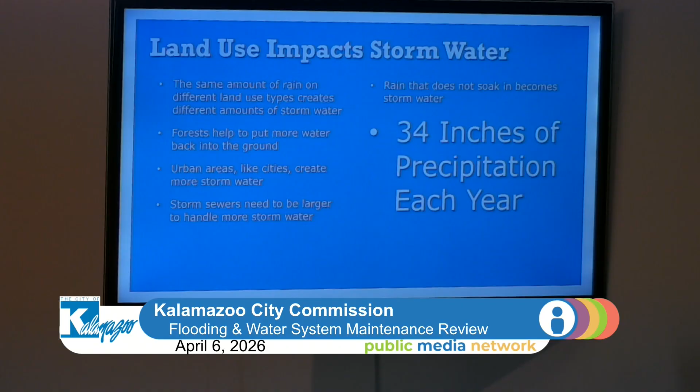Rainfall events themselves are very important to runoff. We could have a storm that comes through and drops a whole lot of rain in a short amount of time, like a thunderstorm dropping a lot of rain in 15 minutes. That's going to produce a different amount of runoff than a storm that occurs over a whole day. Our stormwater systems are conveyance systems - that means they take rain over a volume of time, so they take volume per unit time to convey it. You get a very different result when you have, say, 2 inches of rain over a whole day versus 2 inches of rain in an hour.

Our stormwater system was designed several years ago. There is certainly maintenance needs that we've got to look at. There's also infrastructure needs that we've got to look at for that overall stormwater system.

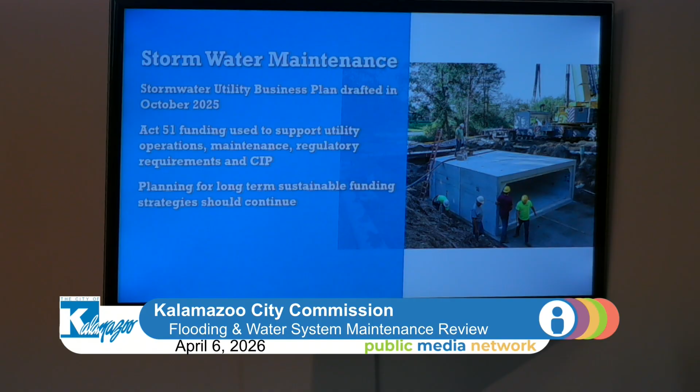We worked on a draft business plan that we put together last fall that identified maintenance strategies and capital improvement strategies specific to our stormwater system. That also developed a revenue requirement that we could then build into our budgets to create a funding model for that stormwater maintenance. We then used the budget process this year to put those costs beginning in 2026 into a long-term budget using right now Act 51. There's still a need for a long-term funding strategy for stormwater, and that's something we're going to continue to work on in the years to come.

Some of the things that we are working on are annual river cleanup events. That's Kalamazoo River, Portage Creek, Axtell Creek, Arcadia Creek, and Davis Creek, where we come out usually in the spring and do cleanup events of the channels, trash, tires, that sort of thing.

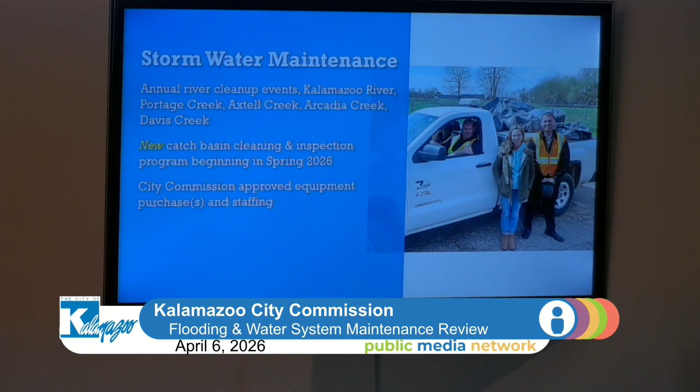We've got a new program, Catch Basin Cleaning and Inspection Program, that's going to launch this year. That's something where City Commission approved some equipment purchases, also approved staffing, and that's going to roll into a program that's going to carry us out for the next 3 years.

The stormwater maintenance strategy is going to focus on those catch basins that we talked about, those inlets, actually pulling the covers off, and then going into the chamber itself and cleaning that out. Inspecting that chamber as well with a work order system, and then reporting back defects so that we can continue to build our capital program.

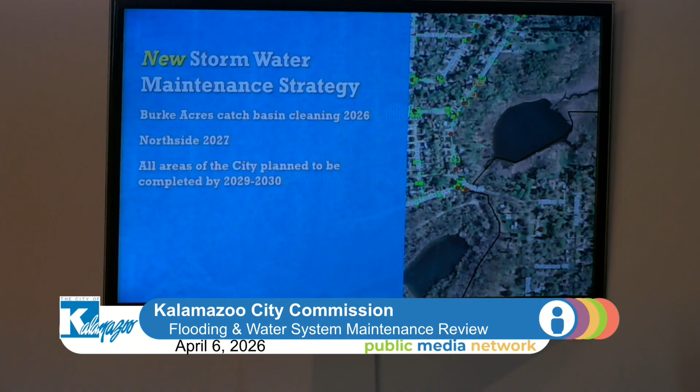This work is going to happen from now through 2029 into 2030. We're going to start in the Burke Acres neighborhood, and we're going to kind of move across the city to the west and then south. So we're starting this program where we started our lead program. That way we're already out ahead of ourselves in terms of a lot of the work that's happening at neighborhood levels. So we didn't want to be in the same neighborhoods doing all this work where we're also doing that lead work and we're also doing that gas main work. So this is happening in areas that have already seen that lead work happen.

We're also going to be sampling 66 outfalls in specific creeks, Axtell Creek, Arcadia Creek, and Davis Creek.

We want to talk through some of the solutions that we have in this urban non-riverine flooding scenario. So we've got a lot of rain. The rain comes down faster than what can go into the storm sewer system, and that can be for a number of reasons. It could be there's defects with the storm sewer system itself. Those could be operational or structural defects. It could be things like leaves or dirt over the drains. It could be broken pipes, that sort of thing.

We also have programs where you're going to start seeing programs in 2027 where we're going to be doing green infrastructure improvements. So these are some new strategies that we've got, just a few in place already. We have one on Water Street right by Anna Whitten Hall where we've got some stormwater offlining. We're going to see more of these projects coming into our portfolio of work. We're going to do some on Burdick Street. Those are programmed for 2027. These are areas where we'll take flow that was going in the stormwater system and we're going to infiltrate that in areas where we can handle that capacity.

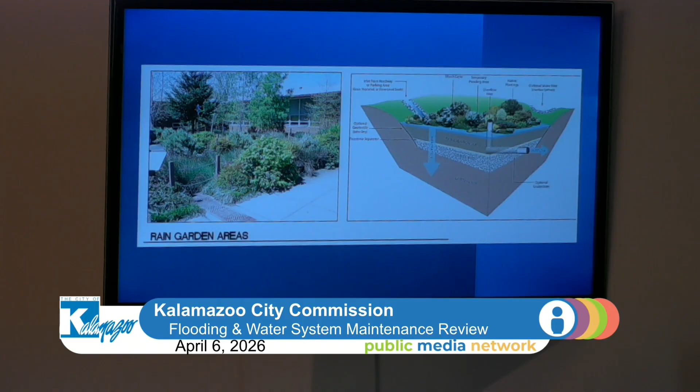We did this type of project a few years ago at the intersection of Church and Hopkins. There was a lot of localized flooding occurring there. It would rain so hard that the water couldn't get into the storm sewers, and the adjacent homes were experiencing basement flooding during storm events. This work was done by city crews over the summer of 2022, and it was very successful in resolving those types of flooding issues.

So a lot of work in the pipeline, so to speak, for the storm sewer system. We're going to get out and clean every structure, over 11,000 structures, in the next 3 years. That's going to open the door for more work as we find out what the defects are with those structures - are there broken pipes? Do they need to be rebuilt? We do have the ability to go in and put in those Kalamazoo double inlet structures to resolve some flooding hotspot issues where we have them. We also have plans to start incorporating green infrastructure with some of our projects coming forward where we have the ability to infiltrate.

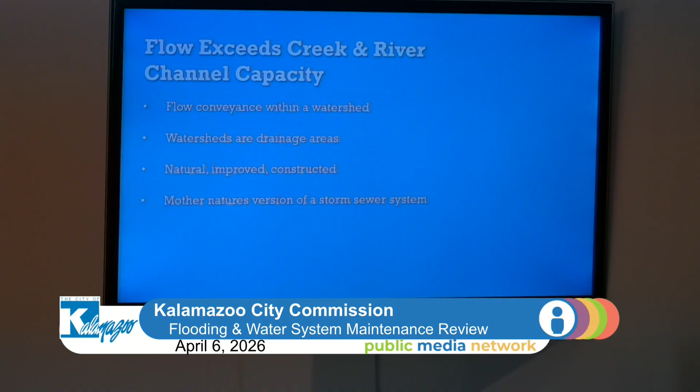So if you think of creeks and rivers like nature's storm sewer system, we're looking at capacity deficiencies there as well. We can see this with Mother Nature, where there's more flow than what a channel can handle. How much flow can a channel handle? That's dictated by the shape of the channel, the slope of that channel, and whether there are obstructions, bends, or bridges in that channel.

So we talked about a lot of solutions for the storm sewer system. When we talk about the Kalamazoo River, it's a little bit beyond us. There's flow coming to us that propagates to the west - once it's coming out of Battle Creek, it's coming our way.

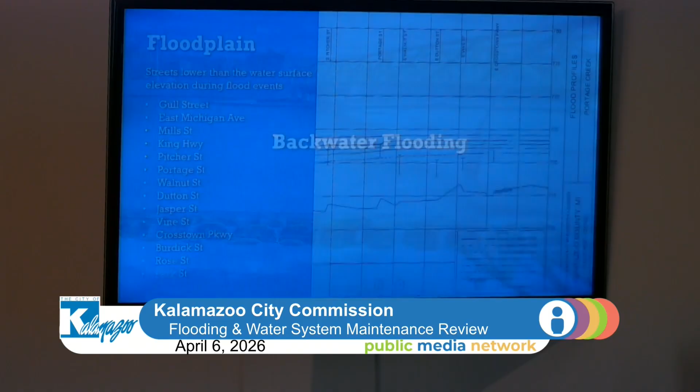Which introduces us to backwater flooding. Backwater flooding is just the terminology for water that is coming back into the system. Water can come back into the system on Portage Creek from the Kalamazoo River. Water can come back into the system from Axtell Creek, from Portage Creek, or from any one of our outfalls.

We have 66 outfalls that are over 30-inch diameter. 30 inches is pretty big, that's 2.5 feet in diameter. There are over 66 of those just within these floodplain areas, and when we're in that high flood stage, all of those can be backwatered back into our neighborhood.

Here's an image of a very difficult scenario we've faced here in Kalamazoo many, many times. This is an image looking out the window from Bronson Hospital at Portage Creek. That is Vine Street, the intersection of Vine and Jasper. You can see that bridge itself is underwater, and the storm drains are under that.

When this event is occurring, as the river level is coming up, propagating higher and higher, it's pushing its water up through the storm drains. Eventually, everything will seek that level.

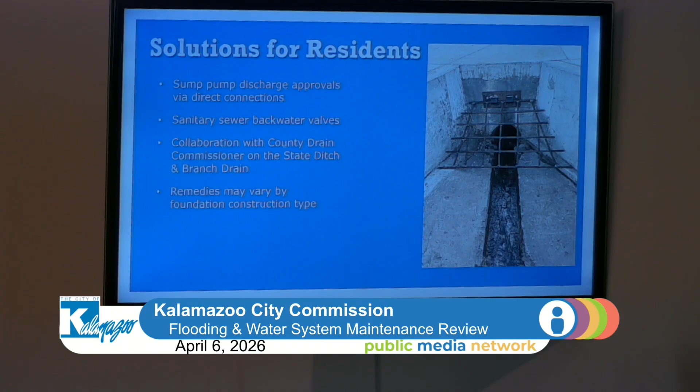So big picture, there's a lot to work on here. There was a plan in place developed by the Army Corps of Engineers. That plan was completed in 1967, with some plans dated as late as 1970, to widen, straighten, and deepen the Kalamazoo River and Portage Creek through Kalamazoo. That would have solved pretty much all the flooding problems we're talking about today.

They would have lowered the Kalamazoo River so much that there would have had to be a low flow check dam at Parchment, because in the summertime there would be no water left in the river. That low flow check dam design was put in place to keep water in the river so there would be fish and things in the summertime.

That project was ultimately scrapped, because of contamination. PCB contamination was discovered in the Kalamazoo River, and the project was deemed ultimately unfeasible in 1972.

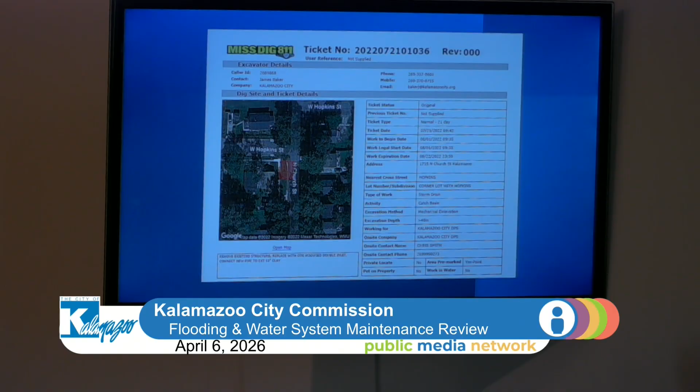We also have targeted capital improvements in some hot spots. I can share with you that Patterson, the intersection with Woodward, the intersection with Cobb, and the intersection with Church Street are on our radar. That's something we're looking for improvements on, similar to the improvements we did on Church at Hopkins. So something like this would be a solution that we would implement in some of those areas.

In terms of this construction season, this summer, that's not likely. Most of our construction season is already packed. That's due to a storm we had last year that pushed us behind on local paving. So we're doing 2025 paving this summer as well, doing our 2025 and 2026 paving this year together.

We've got a lot of great work on sidewalks that we're also pushing out there, and this work is all done by the same crew. So this would be adding more projects to that already piled-on list. Very likely these projects could go into next year.

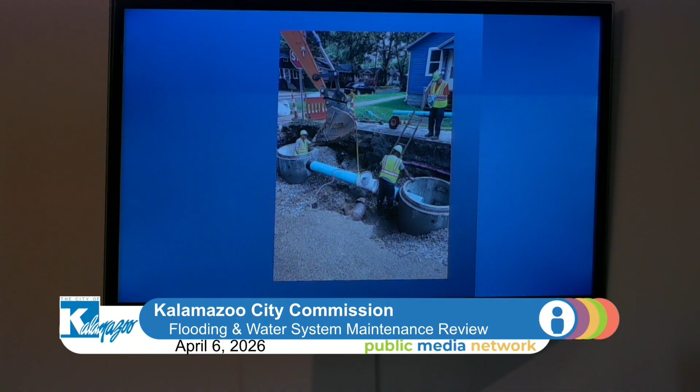There's also a need to coordinate some of this with sanitary sewer. We don't want to go dig up an intersection and fix this, but not have that sanitary sewer work done too. So we've got to coordinate some of the sanitary sewer infrastructure work with that, and coordinate that with those CIP budgets. So there are solutions, but those solutions vary by address, by neighborhood, by watershed, by elevation.

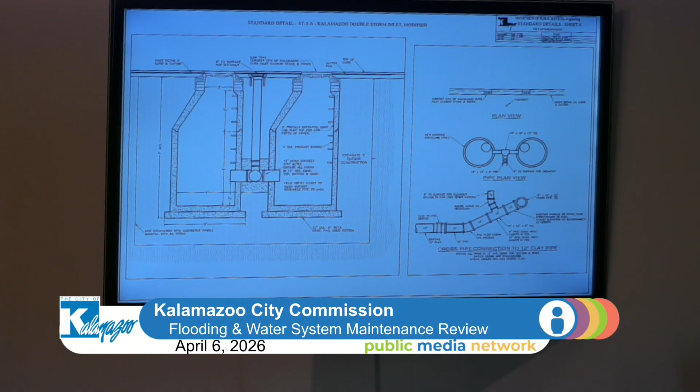But we want to continue to share with the community that we've got projects, we're working on things. We want to hear from those neighbors, so Vice Mayor, please get in touch with me. I want to know what's going on there and see if there's a solution that we offer that we can implement. There may be, but we're just going to have to dive into some more details on those specific locations.

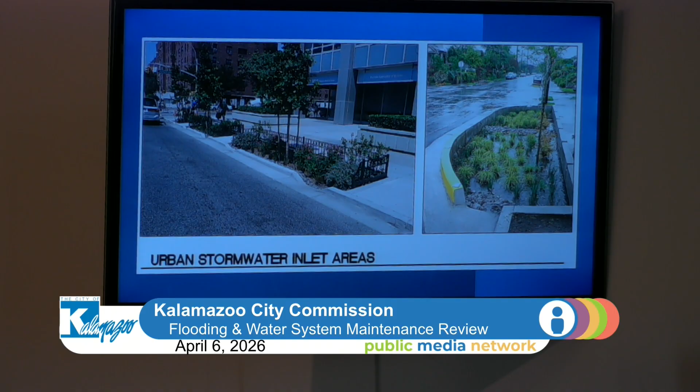Thanks, helpful. Other questions? Commissioner Hess? No? No questions from over here? Just want to give everyone a first shot here before we go back. All set? Commissioner Slaby? Well, thank you to Vice Mayor Duncan.

I just wanted to confirm for the people watching, when it comes to reporting, what's the best way to report where there's flooding? Is it 311? If someone comes out of their house, it's raining, they see it's flooding, should they be reporting this to the city? And when it's not raining and not necessarily flooding, but they notice a storm drain looks really clogged, should they be reporting? Who's the responsibility fall on? Because I know in some communities neighbors will take turns clearing it out, and we have different responsibilities for sidewalk clearance, et cetera. So just curious, if someone saw a defect or something clogged in the storm drain, should they be calling 311 and reporting that for somebody to come out and clean?

Sure, so the answer is going to vary by when it happens. In terms of a storm sewer response, call 311 — that's a non-emergency call.

That call would only be answered during business hours, Monday through Friday, and then that would create a work order to Public Works for a plugged drain. If it's after hours or on the weekend and that flooding is impacting traffic, safety, or motor vehicles, that call would go to public safety as a non-emergency call, and then we'll work with public safety.

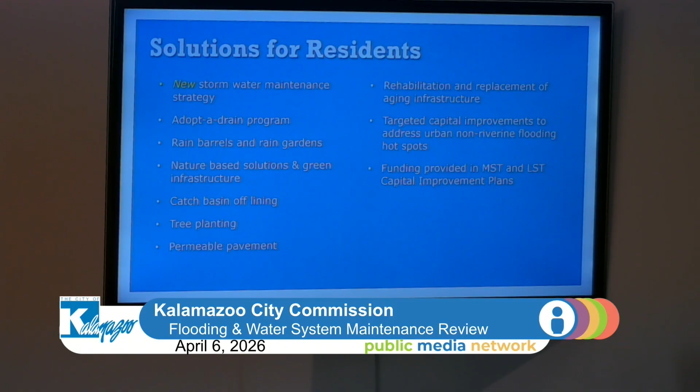We are launching an adopt-a-drain pilot in the Oakwood neighborhood this summer, so that's something we're really excited about. We're working with Community Planning and Economic Development on that, and it's going to open the door to having, at a neighborhood level, the ability to interact and adopt a drain.

And kind of keep it clear of debris and stuff like that. We did see that from the rain event that happened Friday night into Saturday. The rain came down with such intensity, and there's still some residual leaves out there, so we saw a lot of plugged inlets.

Public safety, not public services, was actually out raking inlets and cleaning drains, and calling me, and we got Public Works out there then. Public Works has a little bit different response time than public safety, so it takes us a little bit longer to get moving on some of that stuff.

Thank you so much, appreciate it again. Just a few questions from me then. I appreciate, first of all, I was going to ask about the adopt-a-drain, and you are piloting that. What's that going to look like in terms of how you're going to move that forward, literally giving someone an opportunity to volunteer to adopt a couple storm drain inlets?

I've got some handouts here, I'll share them just in case you ask that question. This is stuff that's more to come, but this is going to open the door and give you a snapshot of how that's going to look, what it's going to look like. So I'll pass it around, you can give it to Clerk Watson, she'll pass it around.